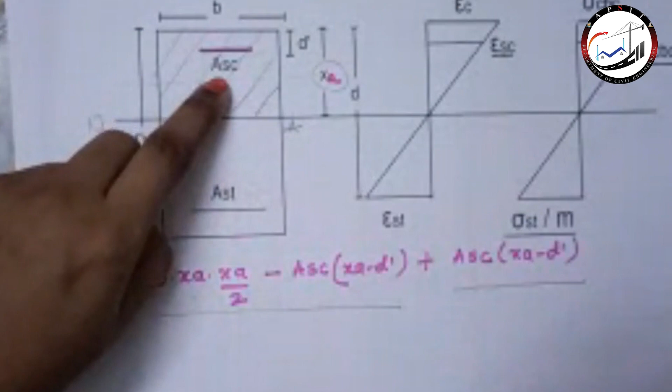Focus on these terms, that now we have two terms with us. One is the area of the steel in tension, another is the area of the steel in compression. I repeated it twice that I am only taking the moment of area on the compression side about the neutral axis. So I am considering only the compression side.

When I say the reinforcement provided on the compression side, it is area of the steel on the compression side. This is really very important. Area of the concrete, I have subtracted this because I want the moment of area for the concrete. Now, as I have subtracted, I again need to add this moment, the moment because of this reinforcement provided.

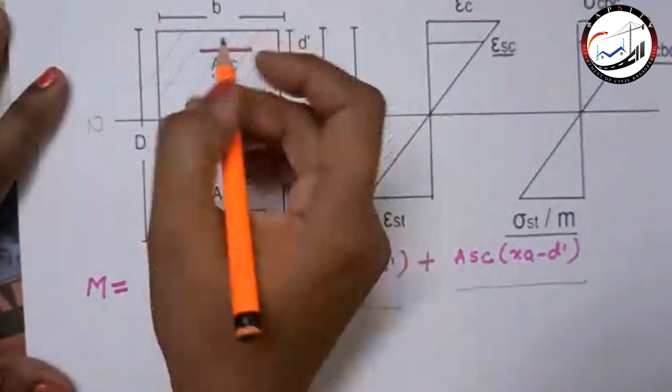So what I'm going to do is, ASC, it is provided in the form of steel. They are bars. It is acting at this point. So area of steel into this distance, this is going to give me moment. Taking only this much part of the area.

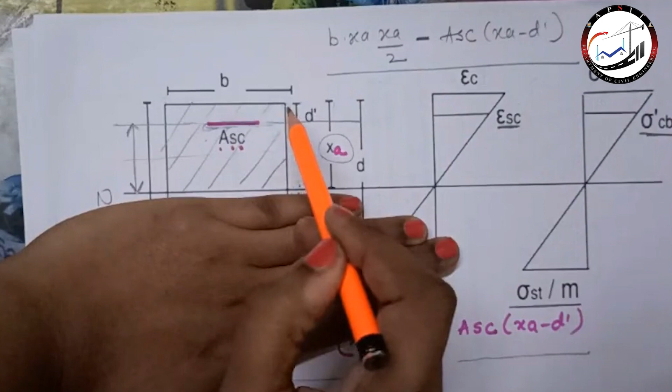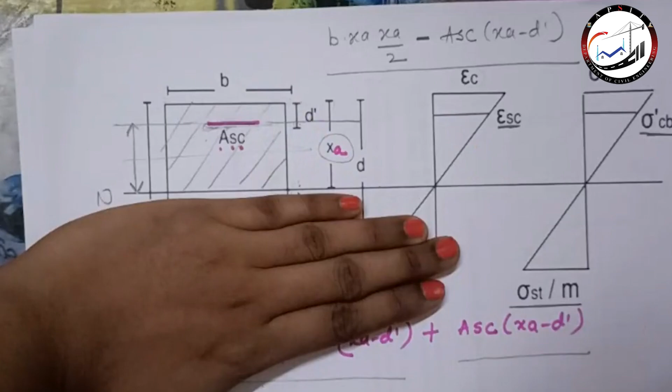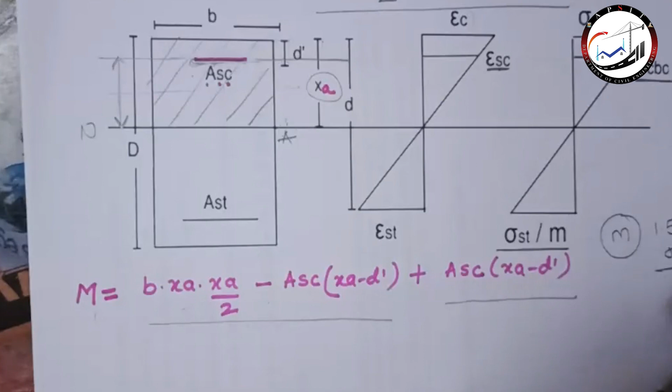The table states that whenever you are writing, again you should not confuse, it says that the calculated compressive stress in the surrounding concrete should be multiplied by 1.5 m instead of taking modular ratio m which we have taken earlier. It says use 1.5 m or sigma sc, whichever is less. So at present we don't know, we are not performing experiments, we are directly taking the value. So what I will say, let me take it as 1.5.

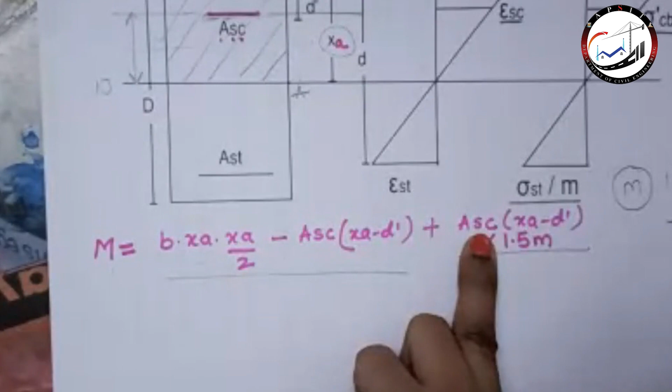Whenever you are taking the compression in the bars in a beam, when the beam is reinforced on the compression side, at that time, to get the compressive resistance of the concrete, either you need to multiply it by 1.5 times m or sigma sc. Whichever is less, you need to multiply that.

At present, I don't know what is sigma sc, because I have not performed the experiment, so I don't know what is sigma sc. So let me multiply it by 1.5 m. What do we multiply? The compressive resistance of the concrete. So I need to multiply this term with respect to 1.5 m.

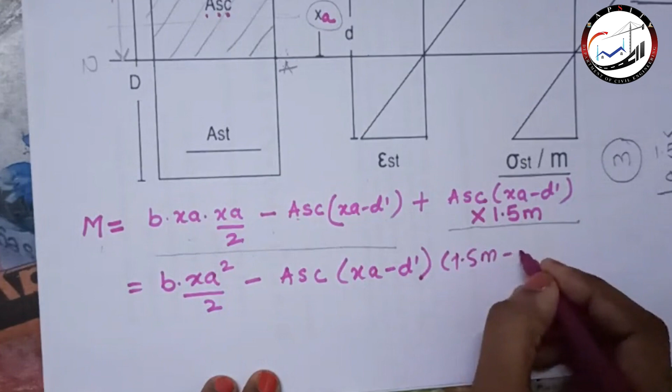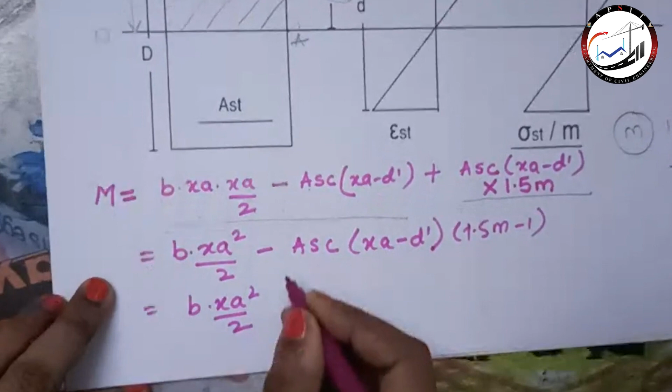I will just again rearrange this so that it will become easier to understand. Minus 1.5m minus 1 into ASC into XA minus D dash.

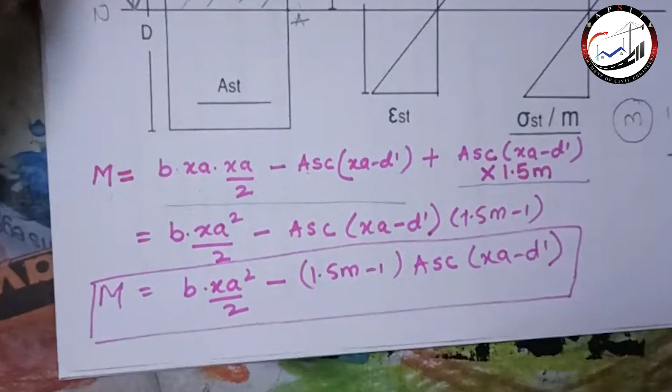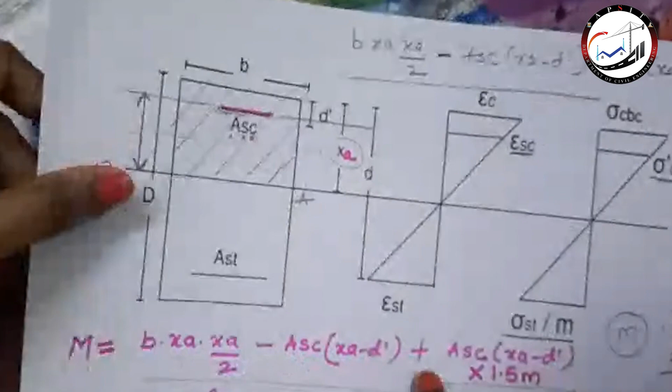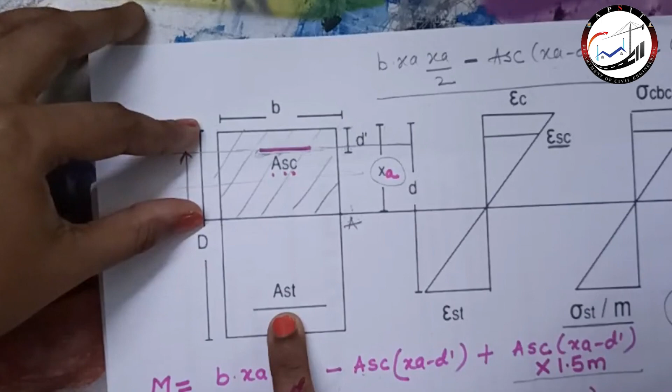So let me say again, it is M, because I am going to equate it. So what is that? It will remain the same what we have done earlier. It is AST into D minus XA, and we will multiply this by M, because we are going to take the equivalent, or you could say the transformed area. So it will be M into AST into D minus XA.

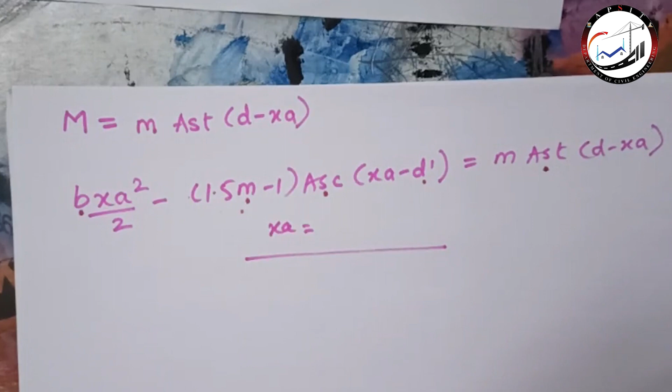What will be the unknown here? XA. So I will get this position of the neutral axis. Once I get the position of the neutral axis, I will compare it with XC, whether it is an over reinforced section or an under reinforced section. So in this way, you can get the position of the neutral axis. Is it clear? If you have any doubt, ask me now. Otherwise, we'll move to the next part.

Yes. Any doubt? Please ask. No, ma'am, no doubt. First of all, okay. What we have done, in short, I'll tell. I have taken the area of the steel in tension as well as the area of the steel in compression to get the position of the neutral axis, taking the moment for the compression and the tension areas about the neutral axis, and then equating both to get the value of the neutral axis.

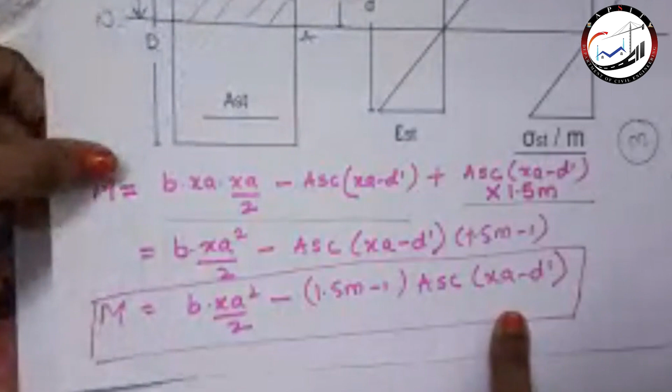So see this equation, that is M is equal to b xa square by 2, 1.5m minus 1. This as well as this, both equations you should be able to derive, and in short you should learn this by heart, because you have to use the equation directly while designing and analysis. Now I have completed one part. I have calculated what is the position of the neutral axis. Now the next thing for me is, when I say that there